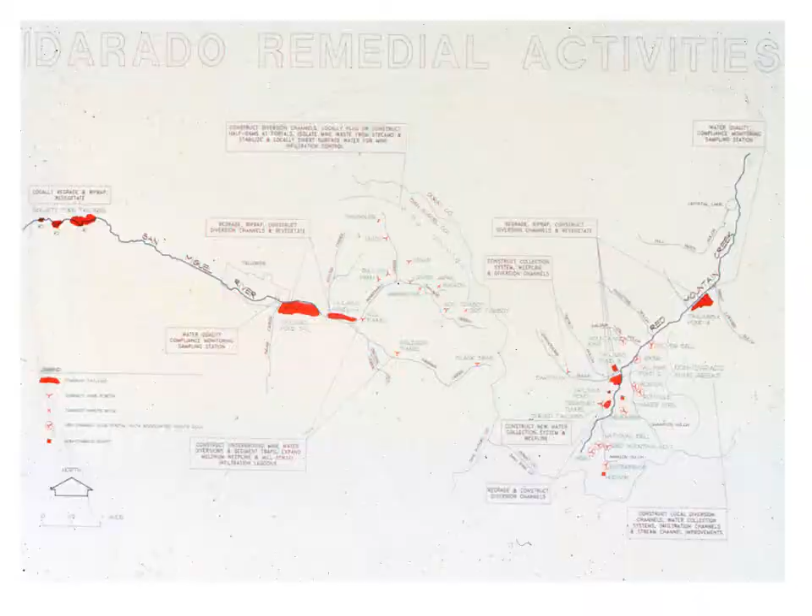This is one of those pictures of a page in a book that was converted to a slide. The original plan was put together before personal computers, so it was all typed. So this is something from the Idarado.

The agreement culminated in a consent decree that was sanctioned by federal court. An appendix to the consent decree, the agreement, is the Remedial Action Plan, we call it the RAP. That's like the cookbook, all the recipes for the various remediation requirements on all the different elements in the project.

I put this slide up here to show you that the entire Idarado Mine Remediation project spans two watersheds. This is the Red Mountain Creek watershed, and these are all the remedial element components that Idarado is required to do remediation on.

And then up and over the Red Mountains into the San Miguel River Basin, we've got Telluride right around here, and then we've got the upper tailings by the Pandora Mill, and we go up into Upper Marshall and Savage Basins where Tomboy mining area is, and this drains into the San Miguel.

The other thing I wanted to point out is that up and over the Red Mountains is Cement Creek, which drains into the Animas River. We heard a lot of talks yesterday about water quality in the Animas, and Gold King Mine is up Cement Creek Basin. Is that correct?

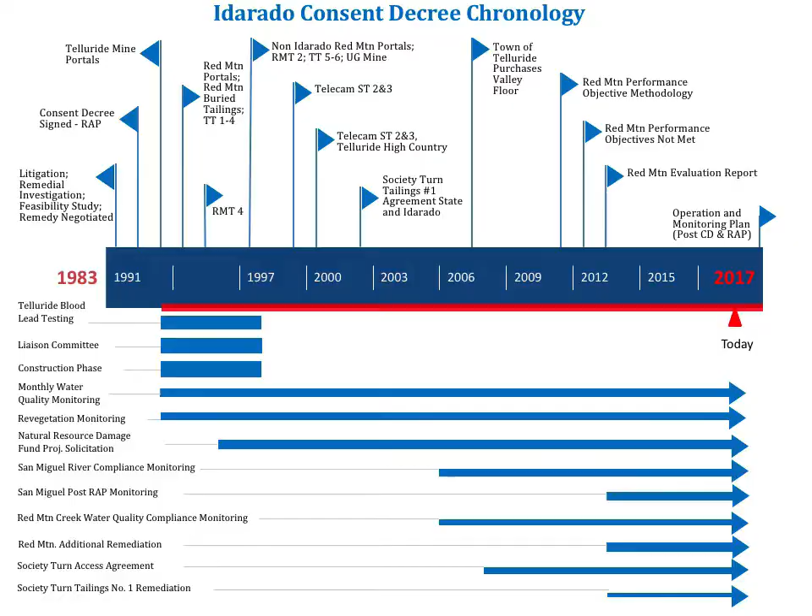With the sedimentation comes the minerals in the rock. Miners went into the various mountains, brought the rock out, crushed it up, put it through the milling process, got the minerals of value out, and what comes out the tail end of the process is what we call tailings. So the inherent chemistry of the mountain is what we see in these waste rock piles. And of course, the red iron pyrite can form acid rock drainage, and then the acid leaches other minerals in that crushed up rock, which is sand and clay. So we have physical sedimentation of these constituents into the atmosphere and river, and we also have leaching and precipitation into the receiving streams.

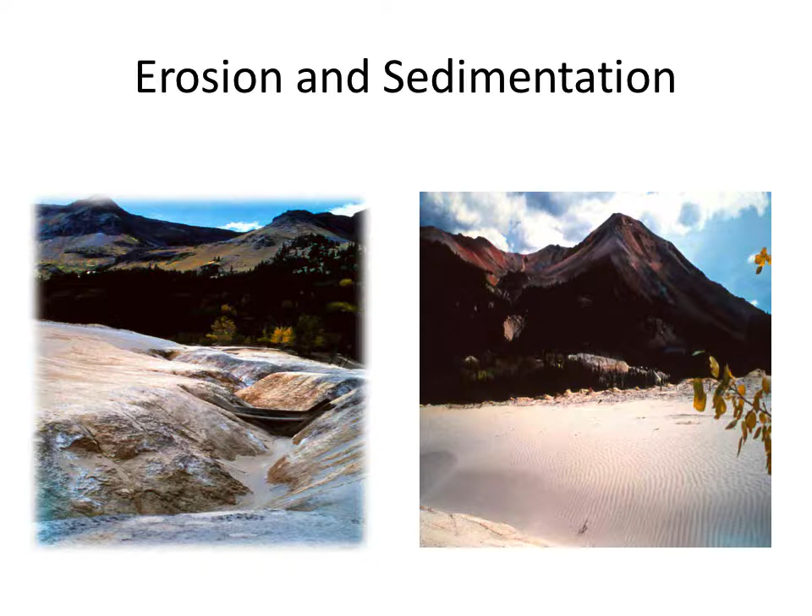We'll see another picture of this after reclamation, so notice this little aspen tree here. We'll see it before and after later, so just keep that in mind.

The goal of the 50% reduction in zinc was to create a healthy, sustainable brown trout fishery in the Uncompahgre River—not in Red Mountain Creek. It was never intended to have fish or bugs in Red Mountain Creek. Going downstream, if we can get 50% of the zinc out upstream, by the time we get to, say, Ouray, the intent was to clean it up enough to have a brown trout fishery. That's where the 50% came from—it wasn't arbitrary. Same thing with San Miguel.

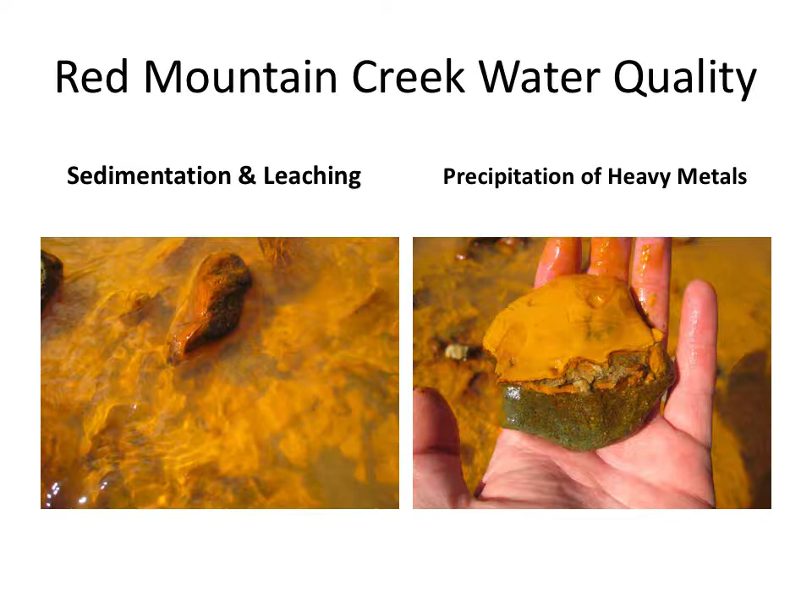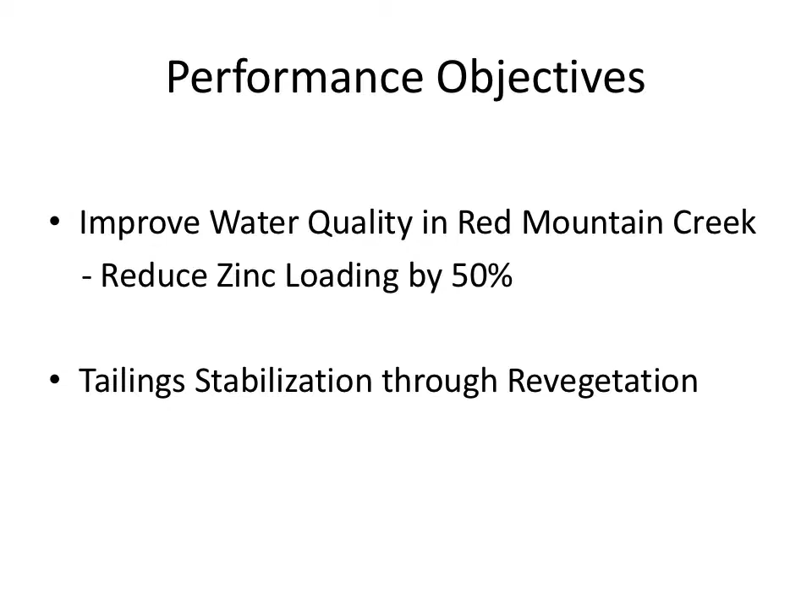So the performance objectives, as I said, are to reduce zinc loading by 50% and achieve tailings stabilization through revegetation. I'm going to talk about the components of the Remedial Action Plan and what was completed to achieve this water quality improvement.

When we have higher loading at low flows, it's pretty indicative of a draining mine system—the majority of the minerals coming into the system are resulting from draining mines. At low flow, the draining mines are not as diluted by rain, storms, or snowmelt runoff as they are during high flow.

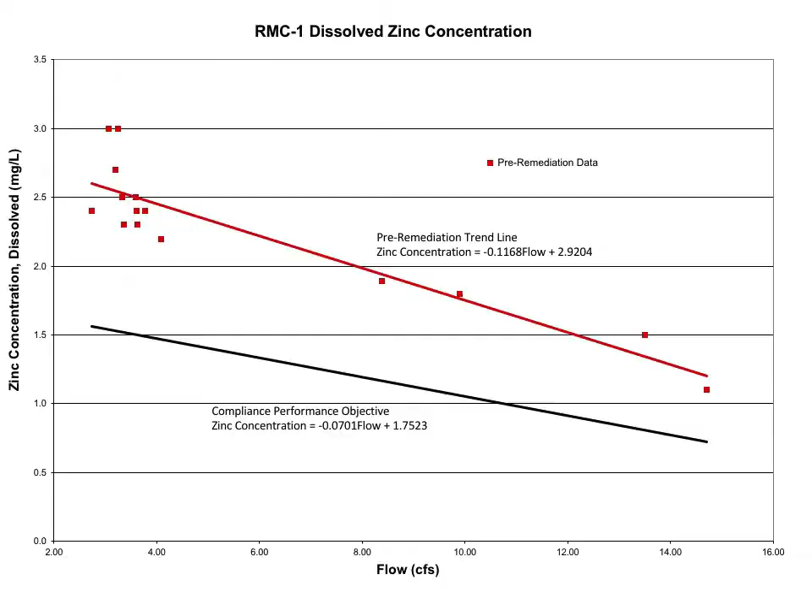So how do we achieve that objective? Basically, the way I like to think about it is it's a water management operation. Water is a substance that can solubilize minerals, can put it into solution. The more acid it is, the more minerals are available to put into solution, and it also is an erosive force.

So if you can manage water from coming in direct contact with mine waste, or underground in heavily mineralized areas, junk in, junk out. So you try to prevent that transport of minerals in the water.

So for tailings stabilization, the issue is both, right? You want to keep water from coming onto the tailings, and you also want to stabilize these very movable fine particles with vegetative cover. You've got the roots that stabilize the ground, and then you have like an umbrella, think of each leaf as an umbrella.

Rainfall hits, you saw that slide yesterday, where the rainfall hit just like the Cheerio in the milk bowl. On a micro level it creates like a geyser, and the little fine particles get entrained in that and transported. So if we can have an umbrella covering the dirt with vegetative cover, and then the roots to stabilize it, it really acts as a good method to stabilize those materials.

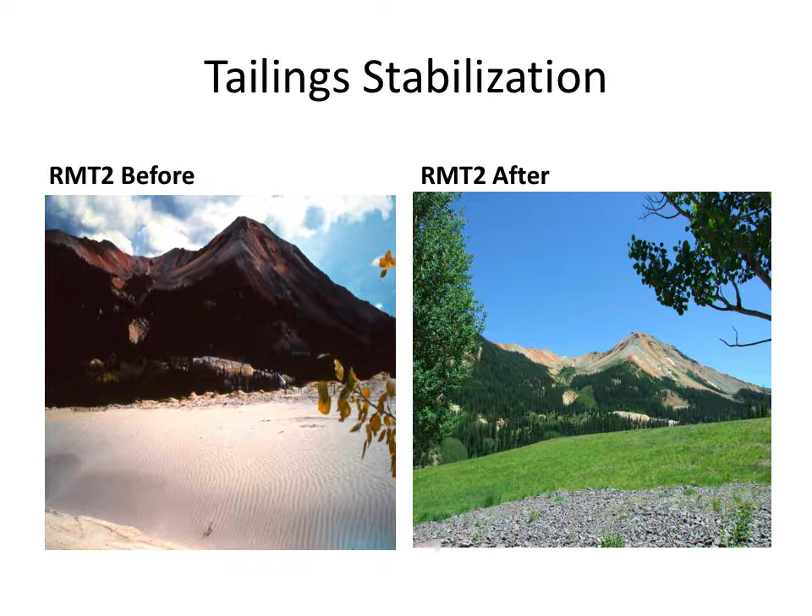The other thing considered was that the top surfaces of the tailings were graded into the mountainside so that water on top didn't run over the side. All of these things were considered and implemented. This is another before and after picture of water erosion, and what Idarado did to stabilize some of the unstable slopes.

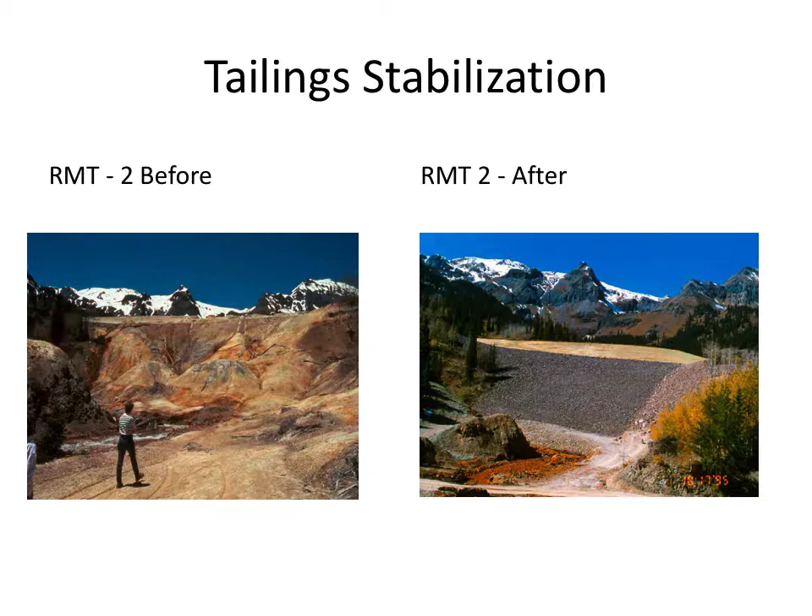This is a picture we'll start today on our tour, in the parking lot right here relative to this photo. This is Red Mountain Tailings Pile number 2 with Red Mountain Creek, and Idarado chose to stabilize this with a rock mulch rather than grassy vegetation.

The concern was if you cut that slope to a 3-to-1, it might have intersected the clay layer in the tailings. The way tailings are constructed, there's an internal clay, slimy part with an outside sandy structural part—they were built as dams, basically. So the concern was if we cut into this too much, we might expose that oozy layer and diminish the stability of that slope. We didn't want to do that, so we kept the slope stable and covered it with rock, which is a really effective mulch to keep things in place and reduce erosion potential.

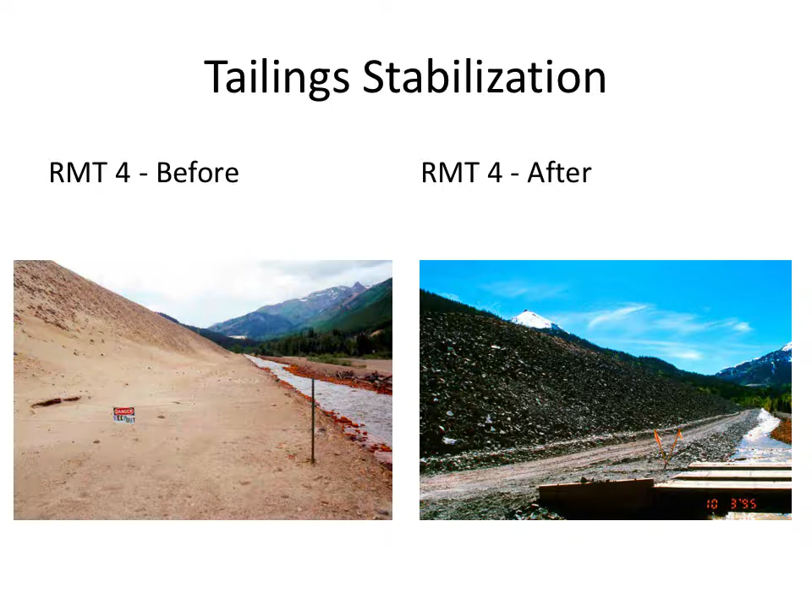You'll see when we get out there, I'm not sure today how much sun has melted it, but there's vegetation volunteering into those rock slopes.

This is really detailed, I don't know if you want to know about it, but this is the vegetation monitoring for the tailings piles. Basically we have live cover and total cover of vegetation. Live cover is the living matter. Total cover is living plus dead plus rock plus rabbit poop plus whatever is covering the ground. So we have the total vegetative cover.

We have total vegetation cover of 70% on slopes, 80% on top, 60%. So 60% of the ground—if you dropped an intersect, a plumb line—6 out of 10 points need to be live vegetative cover for that requirement. For the total, it's whether you hit grass, poop, rock, moss, anything that covers the ground.

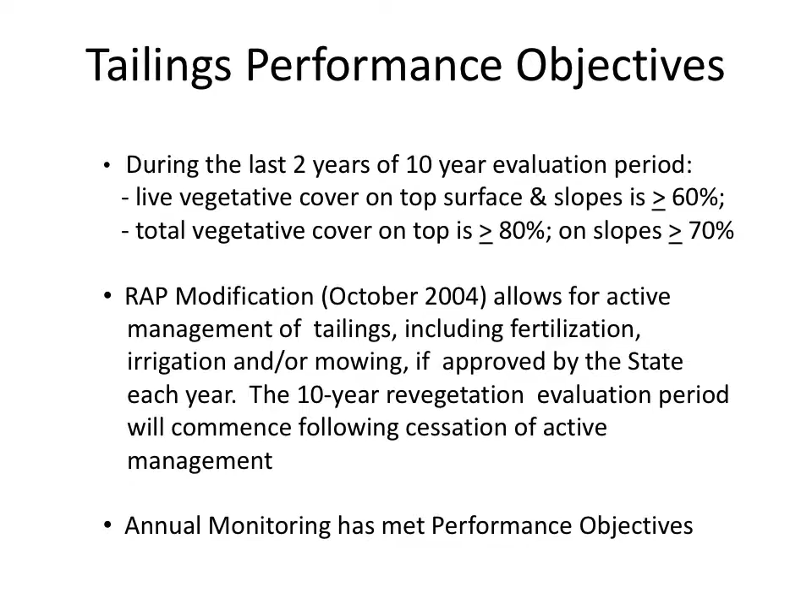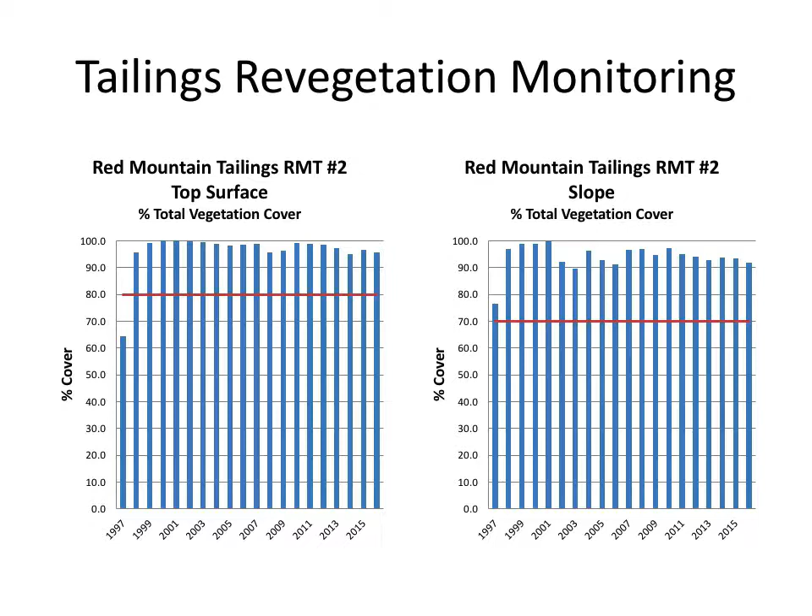We talked about the active management of the tailings, and we'll see this more in basically a slide presentation. This is an example—we have 5 tailings piles on the Red Mountain side. This is just showing you the vegetative cover through time, from '97 to basically 2016. All but for a couple of years, the total vegetation on top exceeded the cover requirements, and on the slope, the total vegetation exceeded the RAP performance objective.

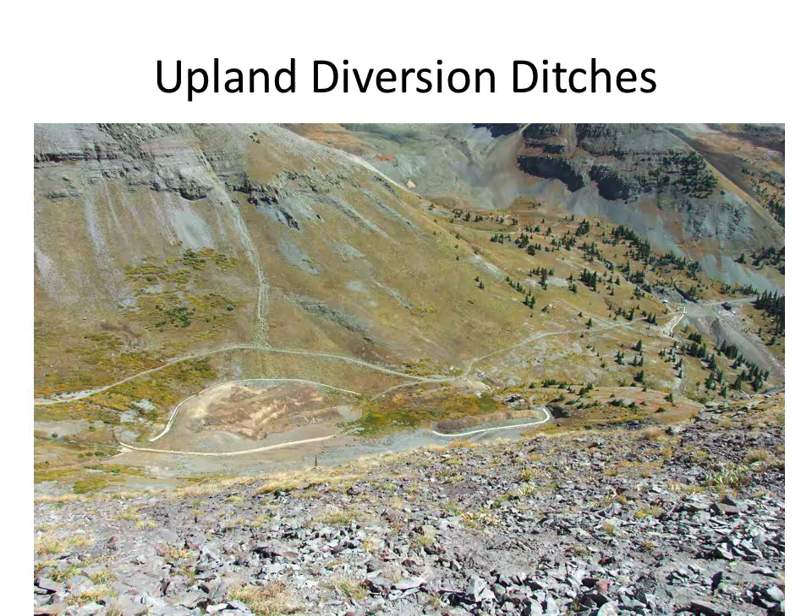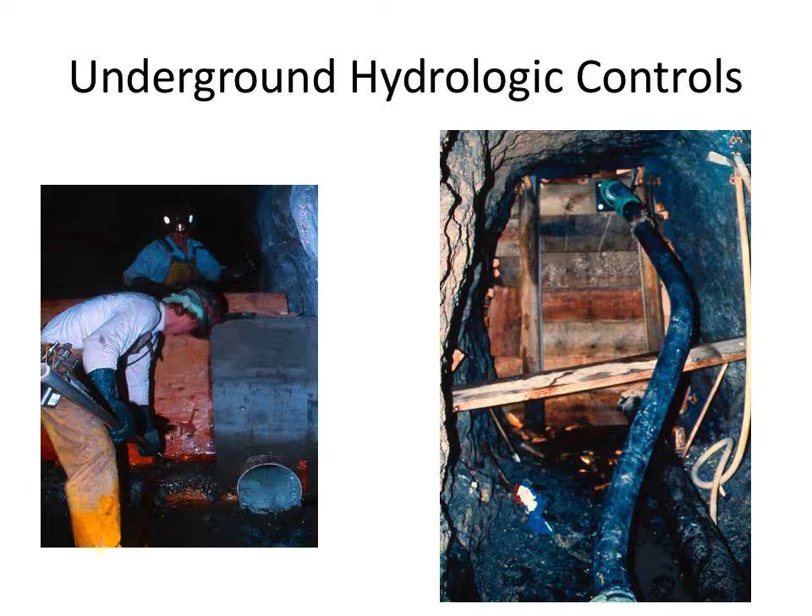The underground work involved more hydrologic modification. Half dams were built to take water underground and pull it back enough so it would go further back into the mine and down another vertical area. You saw those tunnels with various vertical distances. Rather than letting water come through a heavily mineralized part of the mine, they would route it to a less mineralized area. So you have half dams, and in some cases full bulkheads, to send that water out somewhere else. The Idarado mine has the Treasury tunnel, where most of the water comes out on the Red Mountain side, and then the mill level Meldrum tunnels on the Telluride side, so the water comes out in one place. They can monitor it, keep track of it rather than five different places, and reduce the mineralization.

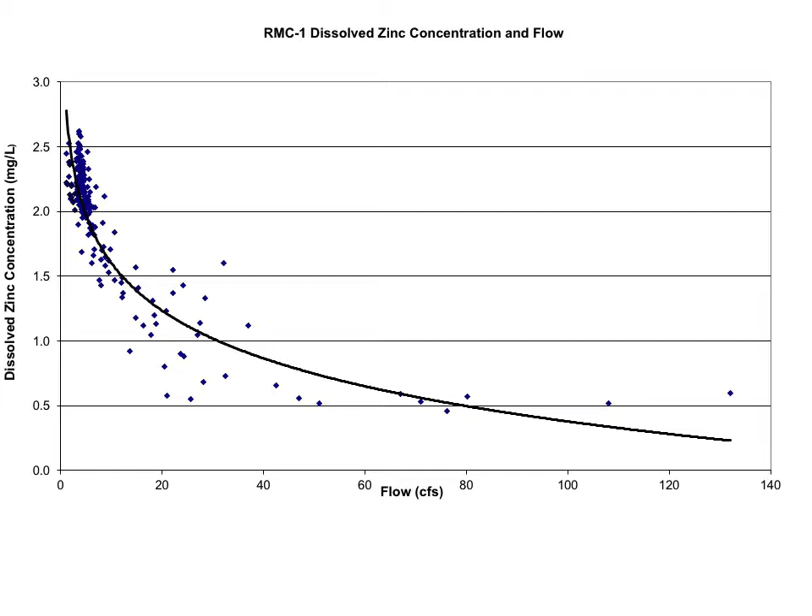So we talked about how dissolved zinc concentrations are inversely proportional to flow rates. We talked about that already. This is a graph that shows that, with flow on the X axis and zinc on the Y axis.

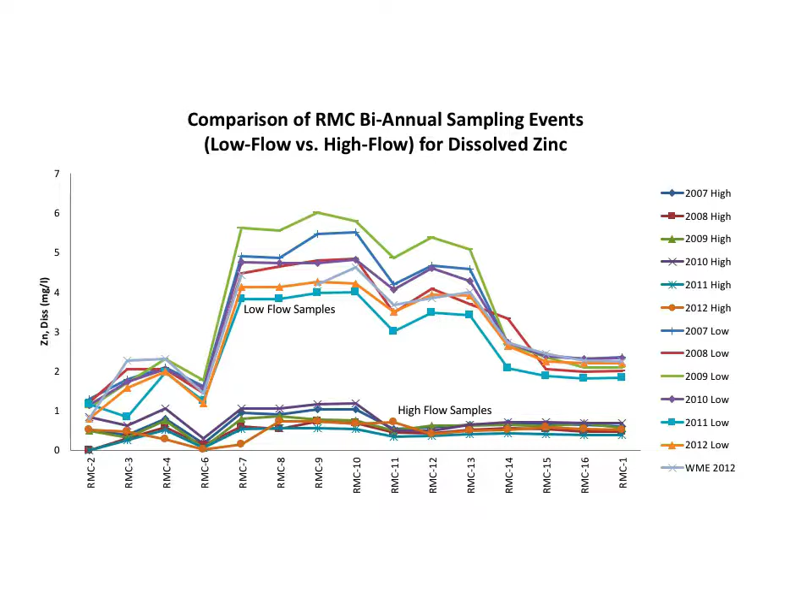This shows, starting up at the upper basin with some of the mines high up in the basin, going down to the lowest sampling point, which is the performance objective monitoring point. By the Genessee mine, the zinc increases, and then by the time we get down to this area it gets diluted again, it's lower. It shows through time that zinc concentrations have improved because of the work Idarado did. That's all that slide shows.

Again, same kind of thing with landmarks. We have the National Bell Mine, Red Mountain Creek, Genessee Mine, and then the different gulches that come in and dilute it.

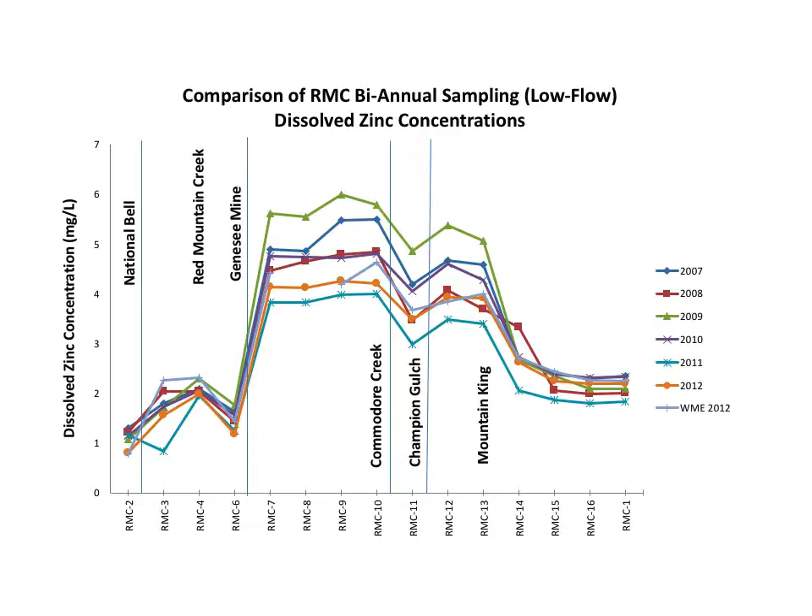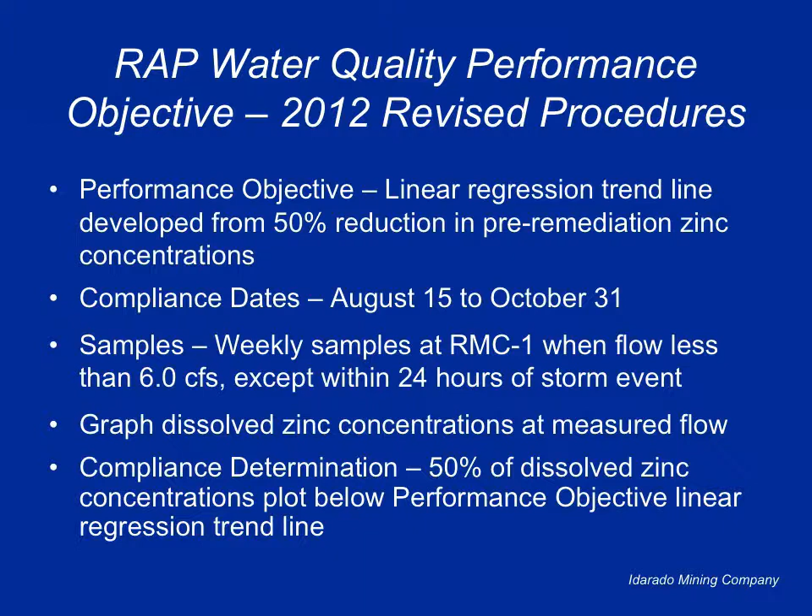This is a lot of information which basically says the performance objective was a 50% reduction. We do the sampling between August and October, less than 6 CFS, to keep flows low and try to eliminate the effects of storm events. We graph it, and then determine if the objective has been met if the data are centered around this line. So the median has to be right on the line, with half above and half below.

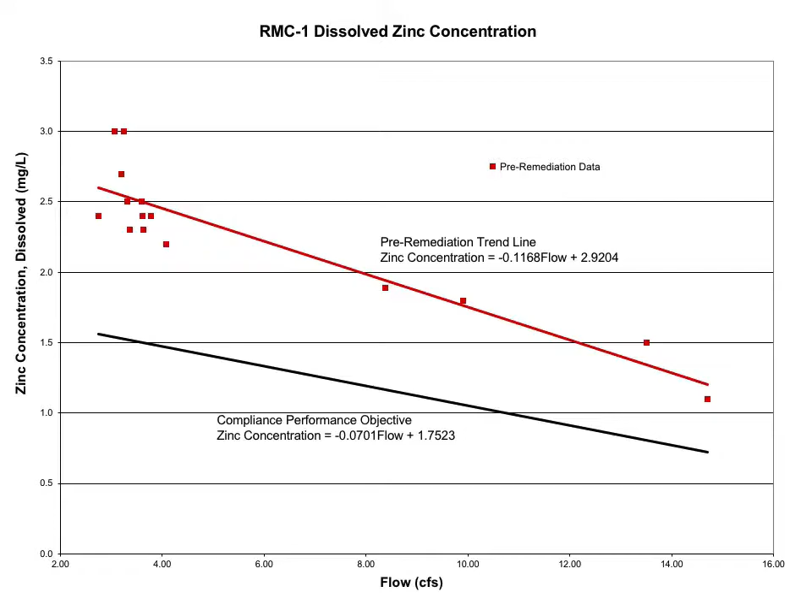This slide shows where we are today. We have the pre-remediation data measured in the 1980s, the performance objective, and where the data wound up in 2016. So this is where we are today, about halfway to where we want to be.

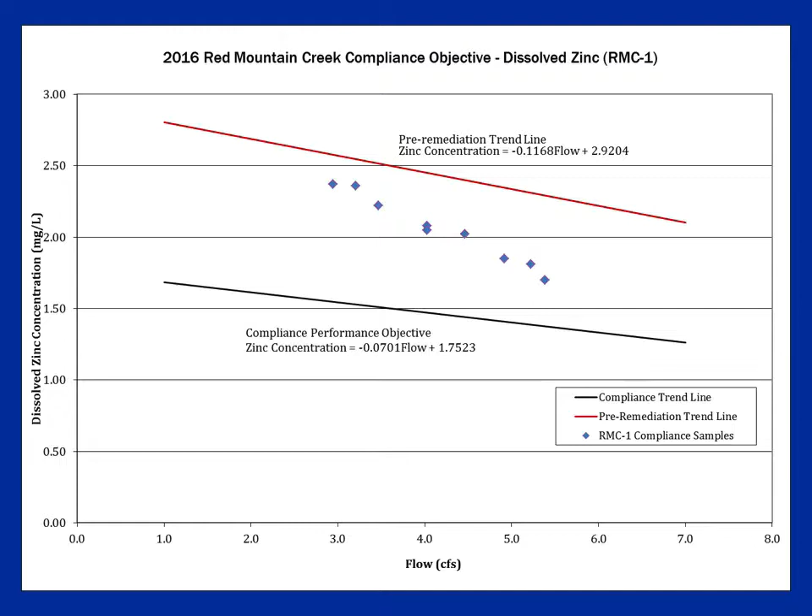This demonstrates that there is some baseline flow, and that the mines are adding some contribution, because the cleanup and work done thus far has reduced the zinc by a quarter. This represents reducing the zinc by half, and this shows we're reducing by about a quarter. So we're about halfway there.

The Remedial Action Plan says if we don't meet the performance objective within 5 years after completion of all the construction work, additional remediation needs to be conducted. So we need to reevaluate all the sites to see what the major loaders were, and come up with a proposal to do additional remedial work to achieve this performance objective. When the initial investigations were done in the early 80s, they identified 12 sites that were the major loaders. After we determined the performance objective had not been met, we went back and reevaluated, and it's the same 12 sites that are still the major loaders. So there was no change there.

You can see which are the major sources of loaders: the Genessee mine, the Rouville tunnel, the Joker tunnel, which is the drainage tunnel for the district, the Treasury tunnel, which is an Idarado property, and a couple of seeps by the tailings piles.

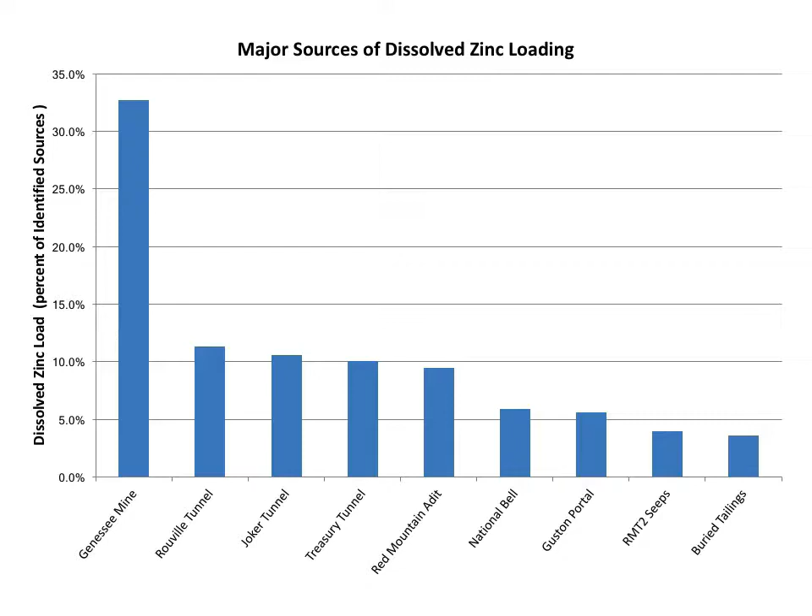Just to note, the Genessee, Rouville, Joker, Red Mountain Adit, National Bell, and Guston are not owned by Idarado. Idarado owns the Treasury Tunnel, and recently purchased the National Bell. So those are two Idarado-owned properties, as are the tailings. The work Idarado is doing today is testing how a certain technology will work on their property, and Dennis will talk more about that. Because they own the Treasury Tunnel, the water coming out of it is where they're doing their pilot plant for additional remediation and water quality improvement.

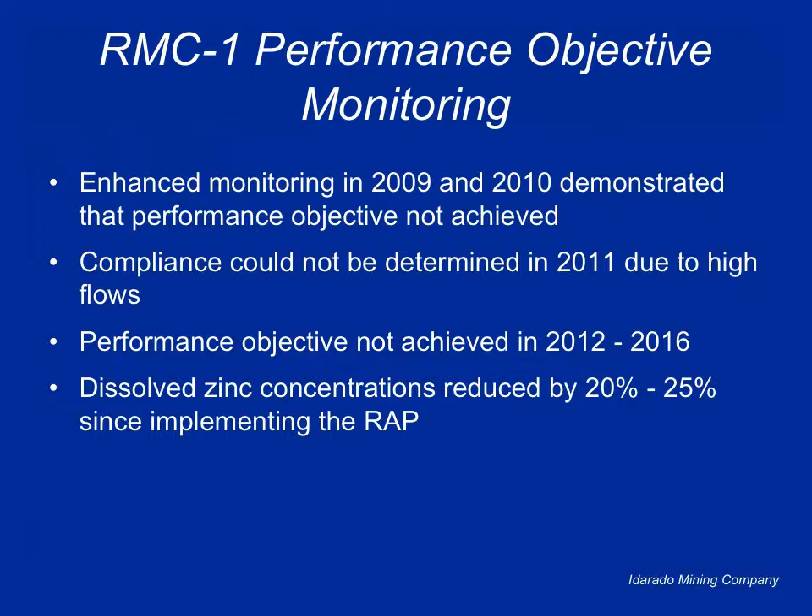This slide shows the performance objective has not been achieved, but zinc concentrations have been reduced by 20 to 25%. Of course, we want to get lower. Because we haven't met the performance objectives, there's a contingency plan.

When the people who wrote the consent decree and the remedial action plan started, it was approved in 1992, so it was a couple years in the making with negotiations and citizens' advisory councils - a lot of back and forth. They had to foresee what might happen in the future: if we don't meet this objective, then what do we do? And then what do we do after that? Try to plan for contingency and failure - what if it doesn't work?

So the contingency plan for Red Mountain Creek was additional water quality evaluation - what are the sources of significant zinc loading, and what do we do to get the zinc out?

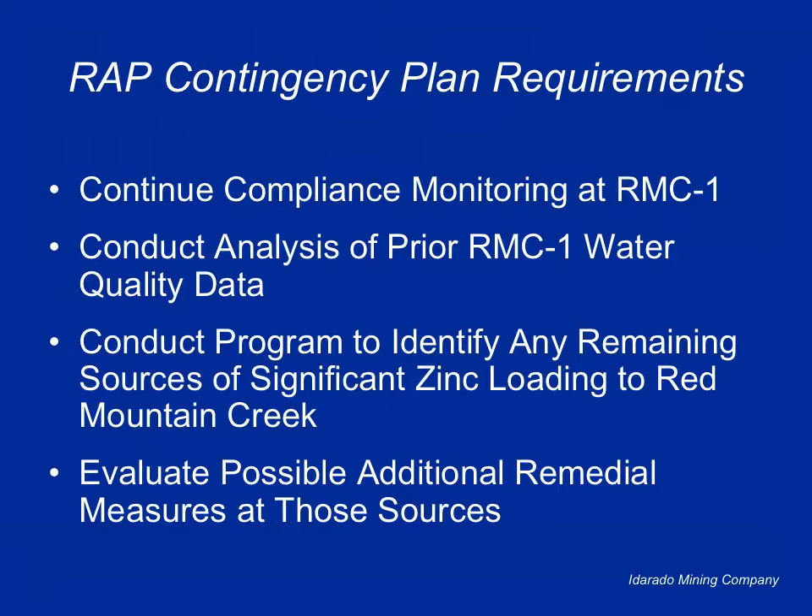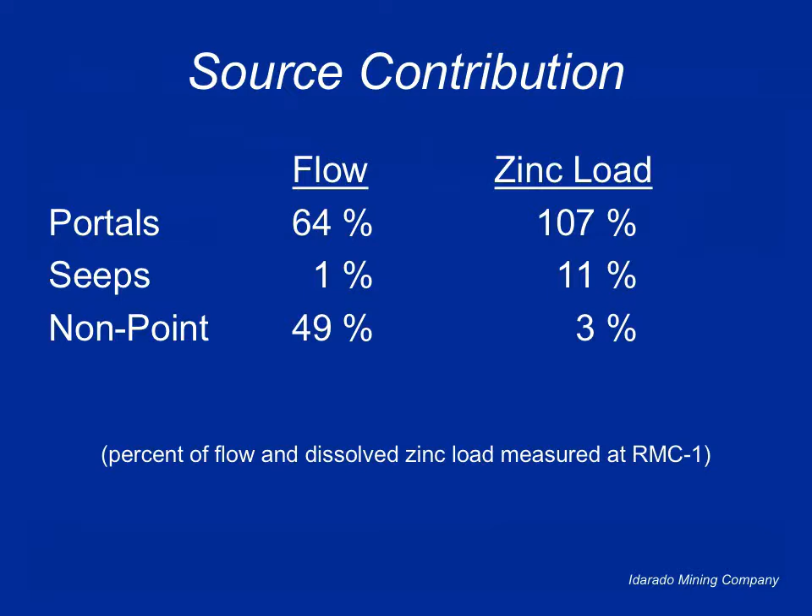This shows, like I mentioned before, the primary contribution to the load is the portals, and then we have the seeps, and then non-point source. How could that add up to 121? You figured it out, so I could go into it.

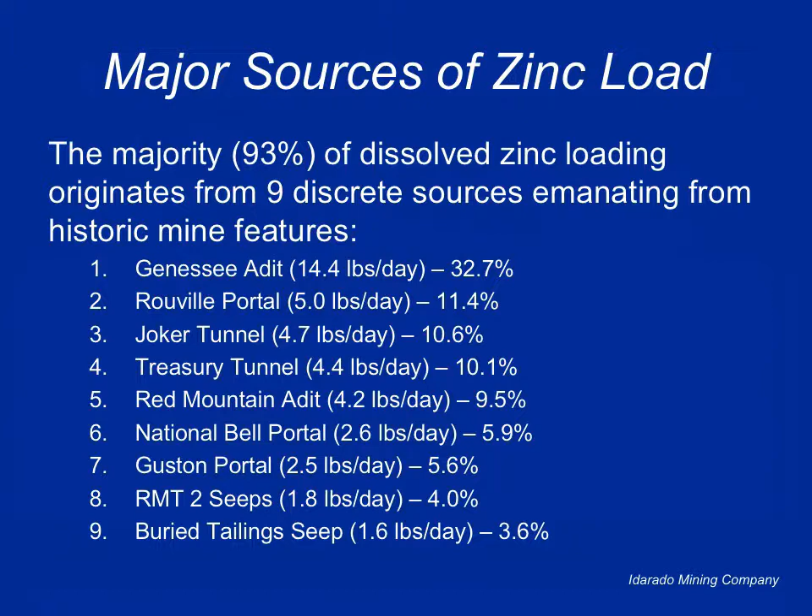What I like to say is that the mines, when all those tunnels were driven into the mountain, they just created the path of least resistance for water. They're designed to drain because miners didn't want to work in wet, cold conditions. So water, all these cracks and faults in the mountain, drains to the lowest point and follows the path of least resistance. That's why it comes boom, right out all these tunnels. When you plug one up, it's going to find the next path of least resistance - kind of like that Dutch boy in the dam. You bulkhead one, you'll pretty much find out what happens next.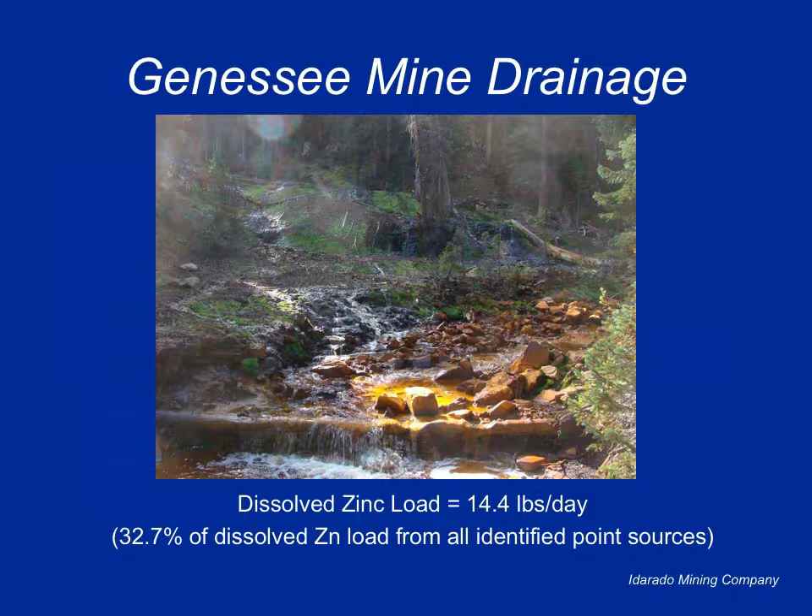Revegetation at the portal - I wish I had a bigger picture of that. The mountain behind it is like a ferricrete mountain. It's beautiful.

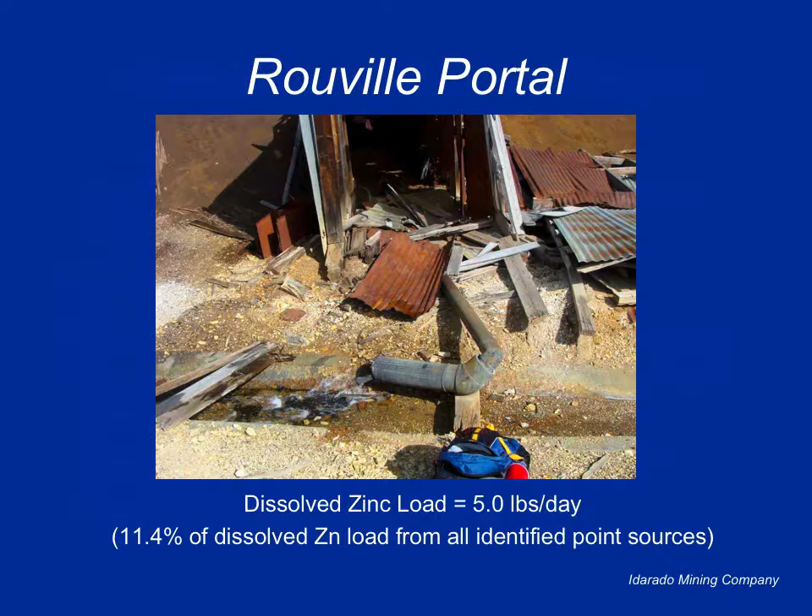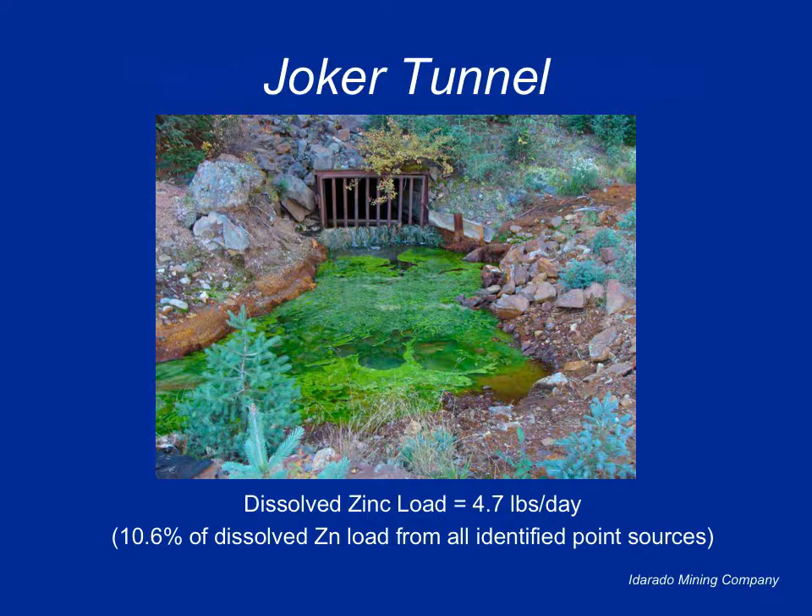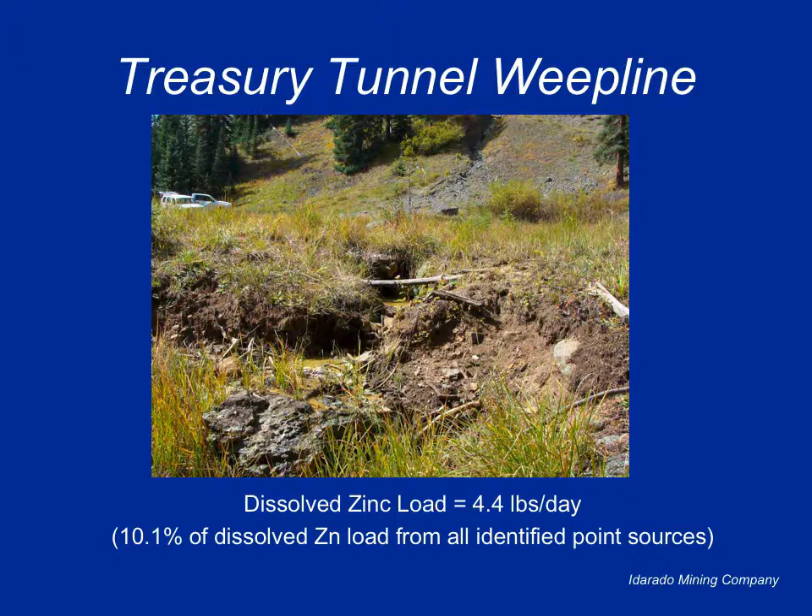Treasury Weepline - the water that comes out of the Treasury tunnel now goes into an infiltration gallery. That's part of the treatment, some of the water treatment processes of the Idarado Mine Remediation Project. Water filtration into the ground, the clay minerals absorb metals of concern. We see that the Treasury, the Meldrum, the mill-level tunnel on the Telluride side is part of the hydrologic control.

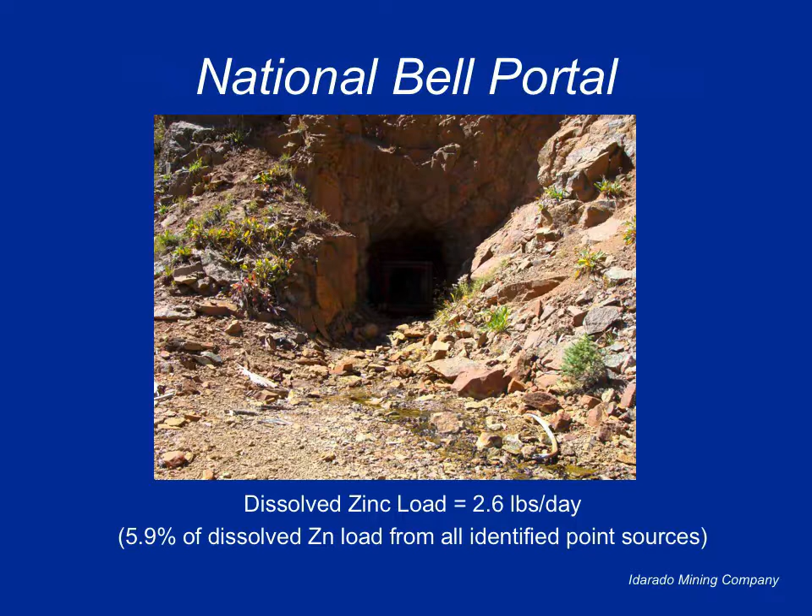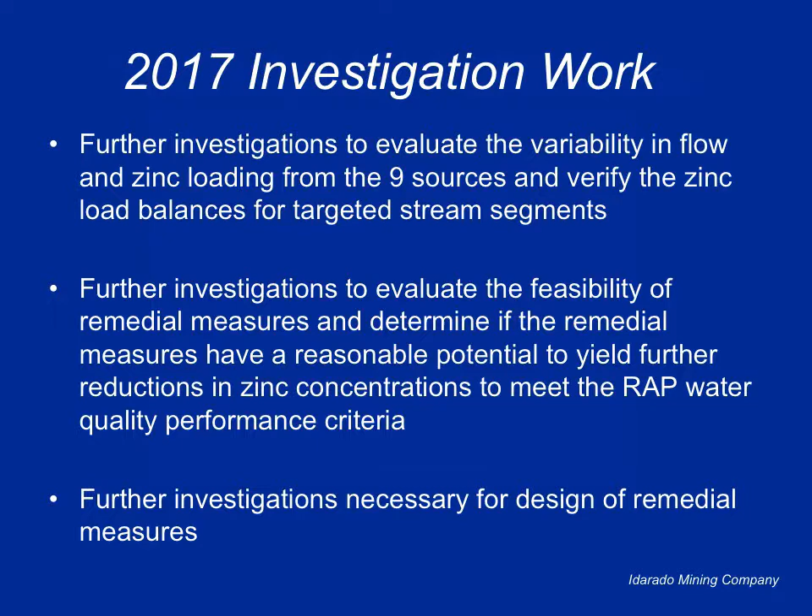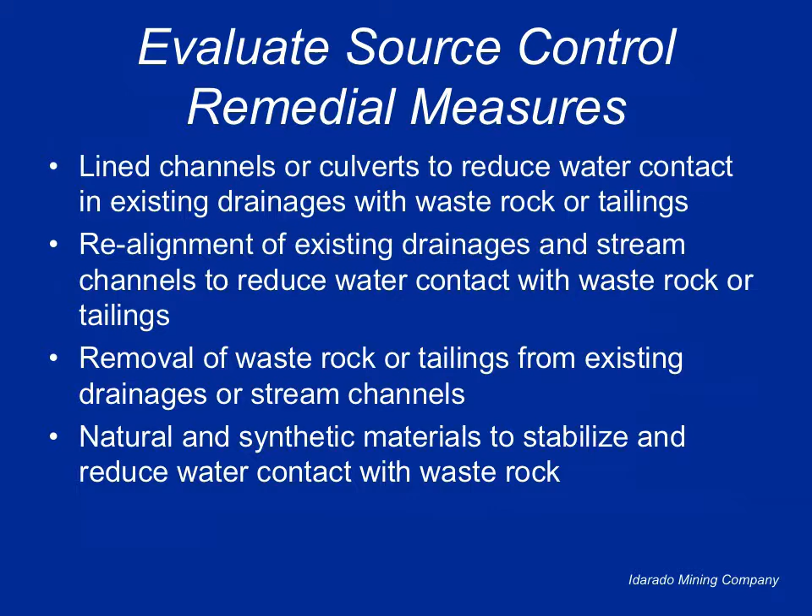Additional work needs to be done to determine what additional remedial measures are going to happen - evaluate the source of the water, what can be done there, which we've talked about: lined channels, realignment of existing drainages to keep water away from waste rock, and removal of waste rock to keep it away from the channels. It's all about keeping the water away from mine waste.

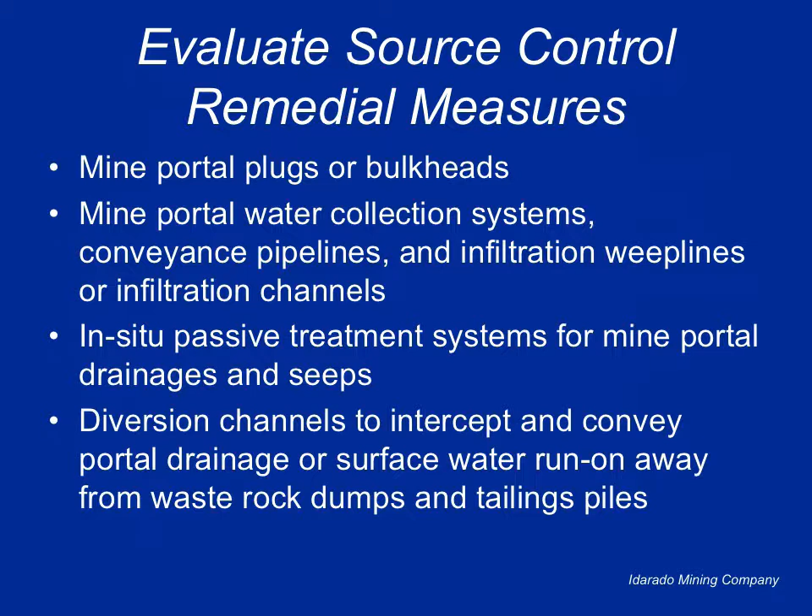We can consider additional considerations - basically the same considerations that were thought of at certain locations in the original plan: bulkheads, water collection systems, infiltration. So we're waiting for additional data from water treatment at Treasury to see if we can get some of the minerals out of the draining lines, since that's the primary source of the metal loading, and additional work may be done after that. That concludes my presentation.